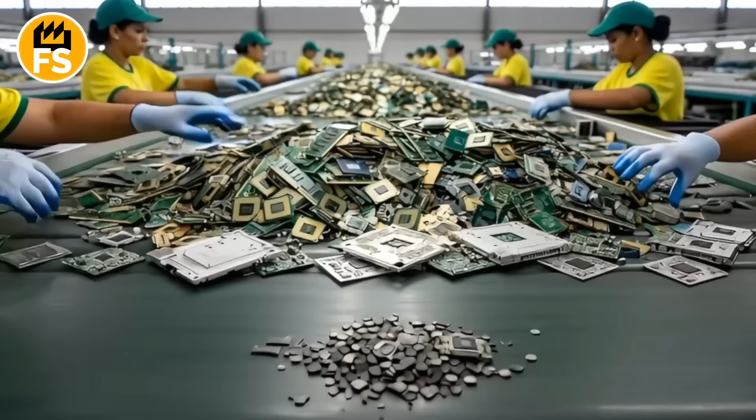Every year, over 50 million tons of electronic waste are generated worldwide, a weight greater than all the airplanes ever built by man. Some of this equipment disappears into the shadow market, while another part goes to legal centers where gold, copper, and palladium are extracted from it.

But what happens to your old laptop after you turn it in at a collection point? Where do the hard drives with personal data disappear? And how is pure gold of 99.9% purity born from a pile of scrap? Watch until the end, and you will find out what the most profitable side of electronics disposal is hiding.

In many cities, there are stationary or mobile points where people can bring old devices. They are often organized by municipalities, environmental organizations, or the recycling companies themselves. These points can be located in shopping centers, near supermarkets, or on separate sites.

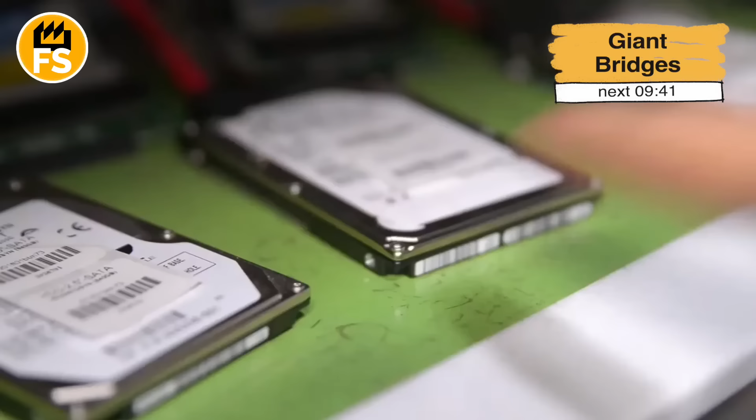Campaigns and promotions are regularly held, during which large retail chains or electronics manufacturers organize temporary collection points. This encourages people not to throw away e-waste, but to turn it in for recycling. Some companies offer services for picking up old electronics directly from homes, especially when it comes to large devices like refrigerators or televisions. Large volumes of electronic waste come from companies, offices, educational, and government institutions.

When companies update their computer fleets, servers, telecommunications equipment, they enter into contracts with specialized disposal companies. This allows them to comply with environmental standards and ensure the secure destruction of data. For a business, the destruction of confidential information from hard drives and other media is extremely important. Recycling companies often offer services for certified data destruction before recycling.

In many countries, there are laws that require electronics manufacturers to be responsible for the life cycle of their products, including their disposal.

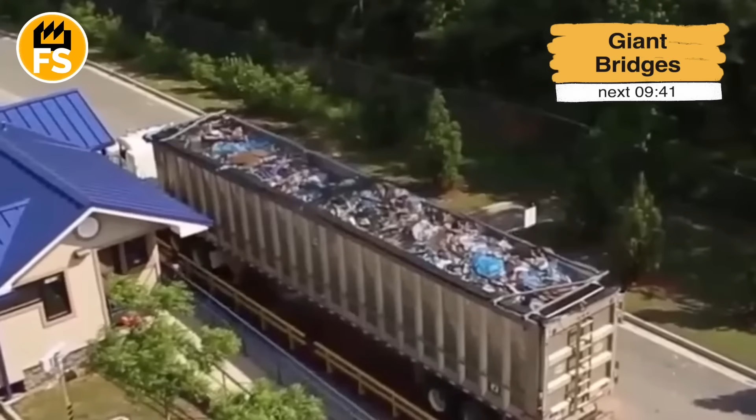When the electronics are collected, they are transported to the centralized warehouses of recycling plants. There, they undergo initial sorting. Large batches of a single type of electronics, for example, only old computer boards or only mobile phones, can be separated to optimize the further processes of disassembly and extraction of valuable materials. Thus, a whole stream of electronic devices enters the warehouse of a recycling enterprise, ready for their valuable components, including gold, to get a second life.

After the trucks deliver mountains of electronic waste to the recycling warehouse, the first and very important stage begins: manual disassembly. At this stage, teams of qualified technicians and operators work. This is not just breaking old devices. It is a systematic process aimed at maximizing the extraction of valuable components and separating hazardous materials.

Each workplace is equipped with the necessary tools: screwdrivers of various types, pliers, wire cutters, as well as specialized devices for safely opening cases. Proper lighting and ventilation are also important, as some components may contain harmful substances. Workers must wear protective equipment, gloves, goggles, and sometimes respirators.

The process begins with relatively light devices, such as laptops, desktop computers, and televisions. Specialists sequentially disconnect the main units. Lithium-ion batteries, found in laptops and mobile phones, are removed first. They are potentially flammable and contain valuable metals that require separate recycling.

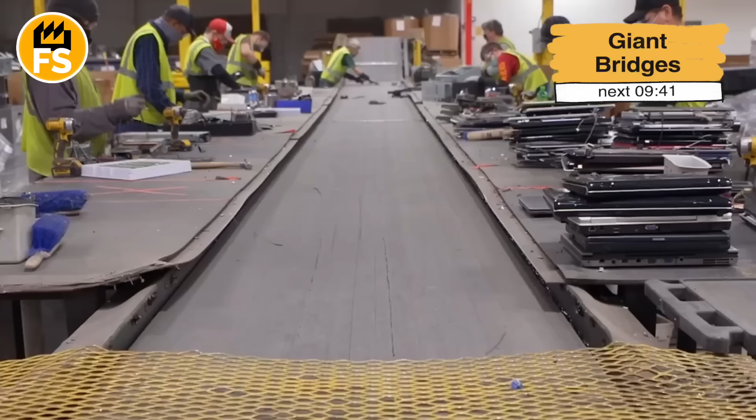Printed circuit boards are one of the richest sources of gold, as well as silver, palladium, and copper. The boards are carefully removed from the cases. Central processors and RAM modules are especially valuable, as they contain significantly more gold than other parts of the board, so they are often separated for separate, more intensive processing. Each removed component is placed in a special container.

For example, one container for printed circuit boards, another for processors, a third for batteries, a fourth for aluminum parts, and so on. This sorting is critically important, as it optimizes the subsequent stages of recycling. Components with a high gold content will be sent to more targeted and intensive extraction processes.

After the initial manual disassembly and sorting, when components with a high gold content, such as processors, memory, and gold-plated connectors, have been separated, much more targeted and intensive processes for their recycling begin. These methods are aimed at the most efficient and economically viable extraction of the precious metal. They combine mechanical, chemical, and sometimes even electrochemical approaches.

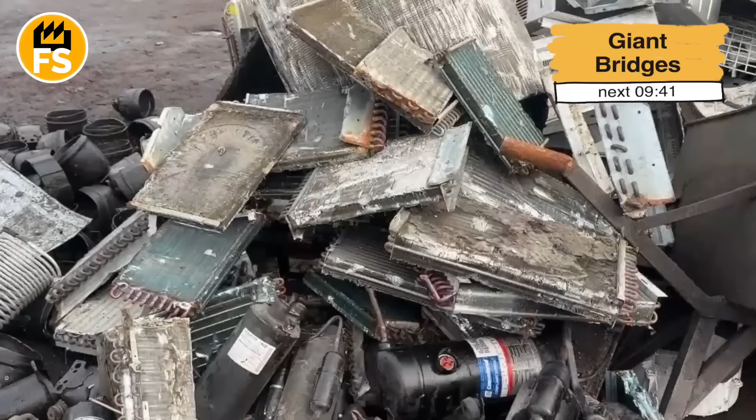The first step is often further mechanical processing to further concentrate the gold-bearing material. Processors, for example, consist of a ceramic or organic case, metal contacts, and sometimes metal covers. These parts need to be separated. This is usually done with the help of special shredders or milling machines that allow for the separation of the metal legs or contacts from the main part. Some processors may be subjected to thermal shock to crack the ceramic case and release the gold-bearing parts.

The separated gold-bearing metal parts are crushed into small granules or powder. This process increases the surface area of the material, which is critically important for further chemical processing. Usually, crushers are used, and then granulators, which grind the material to a fraction size in the range of 0.04 to 0.4 of an inch, and sometimes even smaller.

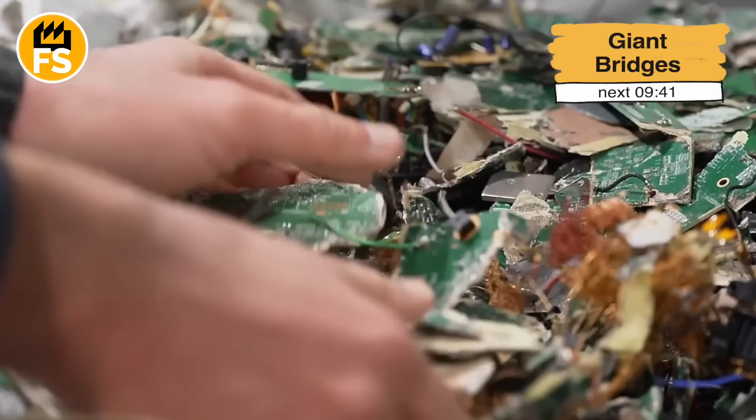After crushing, gravity separation may be applied, for example, vibrating tables, centrifugal separators, or hydrocyclones. Since gold is significantly heavier than most other metals and non-metallic impurities, these methods effectively separate fine gold particles from lighter materials, creating a more concentrated, heavy metal slurry.

For large volumes of gold-bearing concentrates, especially if they contain a significant amount of copper or other base metals, high-temperature smelting is used. The concentrated powder or fine granules may first be sintered or briquetted for more convenient feeding into the furnace and to reduce dust losses. The material is loaded into special electric or induction furnaces. Temperatures can reach 2,500 degrees Fahrenheit. During smelting, lime or silica is added, which reacts with oxides and other non-metallic impurities, forming a low melting slag.

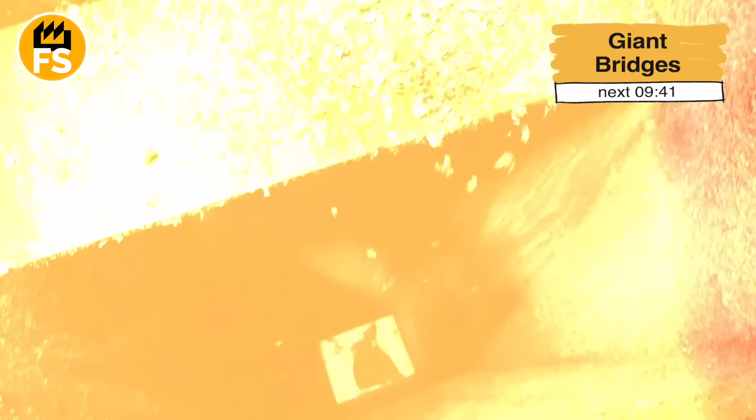Gold, like other precious metals, has a high affinity for molten copper or lead. Therefore, during smelting, gold dissolves in larger volumes of molten copper or lead, forming a so-called black copper or lead alloy. This alloy is then separated from the lighter slag. The alloy can then be further purified in converters, where air or oxygen is blown through the melt to oxidize the remaining base metals, which then pass into the slag. The output is an enriched alloy containing copper and all the precious metals.

After removing the main part of the base metals, the material is treated with reagents that dissolve gold. After dissolving the gold, the solution is filtered to remove undissolved solid residues. Then the gold ions are separated from other metals using various methods. Gold is precipitated from the purified solution by adding reducing agents. These compounds reduce the gold ions to a metallic state, forming a pure gold powder.

The gold powder is thoroughly filtered, washed with distilled water to remove residual chemicals, and dried. The resulting gold powder is melted in high-temperature induction furnaces and cast into ingots or granules. At this stage, high-purity gold is already obtained, often 99.9%.

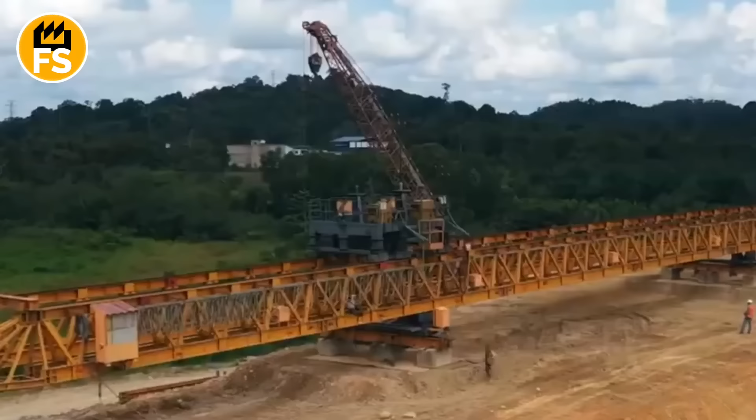Every year, over 500,000 bridges are built worldwide, but only a few of them challenge nature and time. To create a giant capable of withstanding thousands of tons of steel, windstorms, and earthquakes, engineers first dive into the very heart of the Earth, drilling the ground to a depth of over 100 meters, studying every layer of rock. Here, under water and mud, the foundation is born, on which the fate of the entire structure depends.

How do machines weighing as much as houses place piles with millimeter precision? And what will happen if even one of them shifts? Watch until the end, and you will learn what the engineering elite keeps silent about.

The construction of long bridges begins long before the first steel beams or concrete supports appear. It all starts with a site investigation. Engineers analyze the soil, the strength of the current, the level of seismic activity, and the depth of the bottom, if it's a river or a bay. Often, special drilling rigs are used to take rock samples at depths of over 300 feet. These data determine the type of the future bridge: suspension, cable-stayed, or beam.

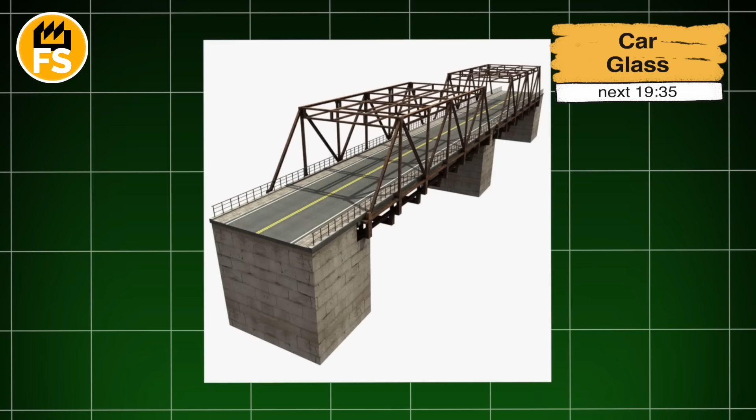After this, a three-dimensional model is created. It takes everything into account: the load from transport, the force of the wind, temperature fluctuations, and even the possible impact of waves during storms. For bridges longer than half a mile, the permissible error in calculations can be no more than a few millimeters. Otherwise, the structure may lose stability.

When the construction of a bridge moves from drawings to the actual ground, one of the most responsible and complex stages begins: the construction of the foundation, or the pile foundation. It is these structures, hidden under water or earth, that support the weight of the entire bridge: thousands of tons of steel, concrete, transport, and even wind load.

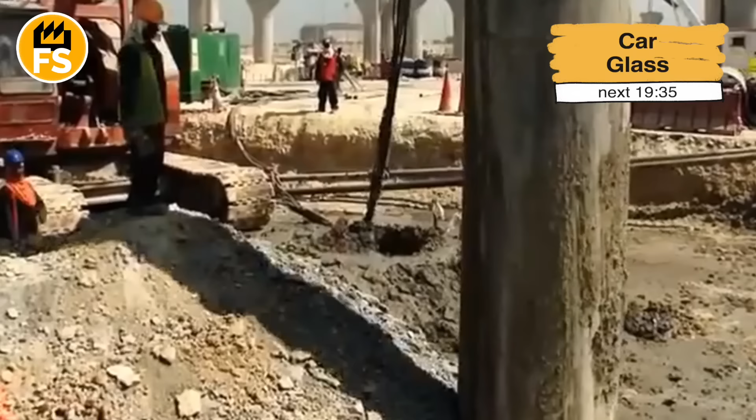Drilling cranes arrive at the site, giant machines with a long mast, a hydraulic drive, and interchangeable drills. They can reach the height of a 3-story building. Steel piles are brought to the worksite. Usually these are pipes with a diameter from 3 to 6 feet and a length of up to 100 feet. In marshy or marine areas, the piles are even larger, sometimes up to 150 feet.

The drilling process takes place in stages. The machine is positioned with an accuracy of a few inches. For this, laser and GPS systems are used. Then the operator lowers the drill into the ground. The powerful rotation of the bit crushes the rock, and a hydraulic system pumps out the resulting pulp. In some areas where the soil is unstable, drilling is carried out with the immersion of casing pipes, metal casings that prevent the walls of the well from collapsing.

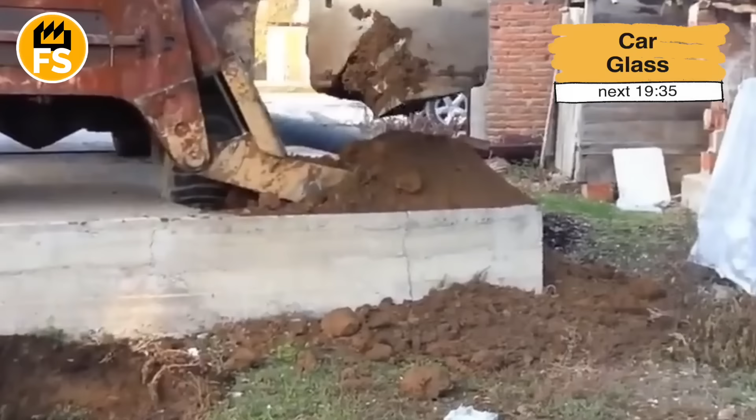When the hole reaches the specified depth, a steel pipe, the pile casing, is installed in it. A reinforcing cage is lowered inside, which strengthens the structure, after which concreting under pressure begins. Through a special hose, a concrete mixture is supplied from the bottom up, displacing water or mud. Thus, a dense, air-free mass is formed, which over time hardens into a monolith.

In marine areas, floating barges with drilling rigs are used. Divers control the position of the pile underwater, and engineers monitor the process with ultrasonic sensors. In a strong current, drilling is carried out only during periods of calm, when the wave level is minimal.

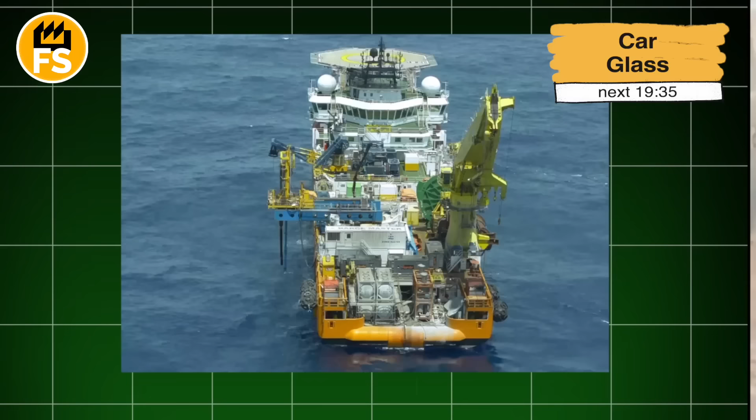When the piles are installed, their tops are cut to the required height, and capitals are mounted on them: large concrete blocks that unite several piles into one support. After this, pylons or columns are erected on these foundations, which are already visible above the surface.

On land, temporary sites are simultaneously set up. These are logistics centers where beams, cables, reinforcement, and concrete sections are stored. Often, huge cranes 300 feet high are used here, which can lift blocks weighing over 200 tons.

When the supports are ready, the turn of the superstructure comes. For bridges of great length, two main technologies are used: suspension and cable-stayed. In a suspension bridge, the main load is carried by steel cables. To secure them, two massive towers, pylons, are first erected. Their height can reach 700 feet, as in the Golden Gate Bridge in San Francisco. The towers are assembled in sections, lifting each one with a crane and connecting them with bolts and welding.

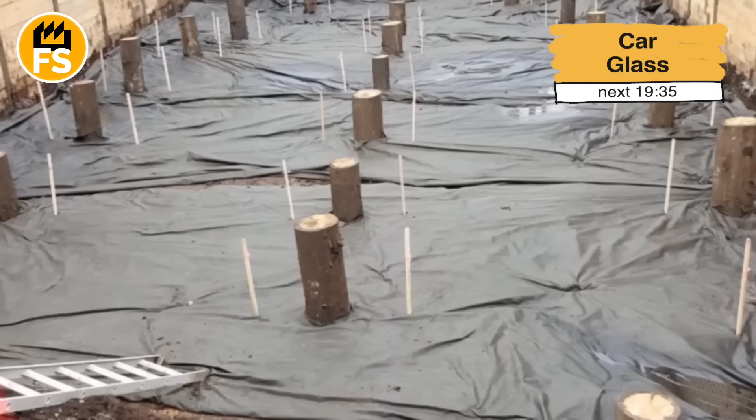After the installation of the pylons, the main cables are stretched between them. This is a complex process that is carried out in stages. Thin steel wires, the thickness of a finger, are stretched one by one by the hundreds, until a main cable several feet thick is formed. Then vertical hangers are attached to these cables. They will hold the roadbed.

In cable-stayed bridges, the main load is transmitted through inclined cables that go directly from the towers to the sections of the roadway. Such cables are made of steel strands with a polymer coating, capable of withstanding a load of over 500 tons. They are installed with the help of hydraulic winches, which precisely regulate the tension.

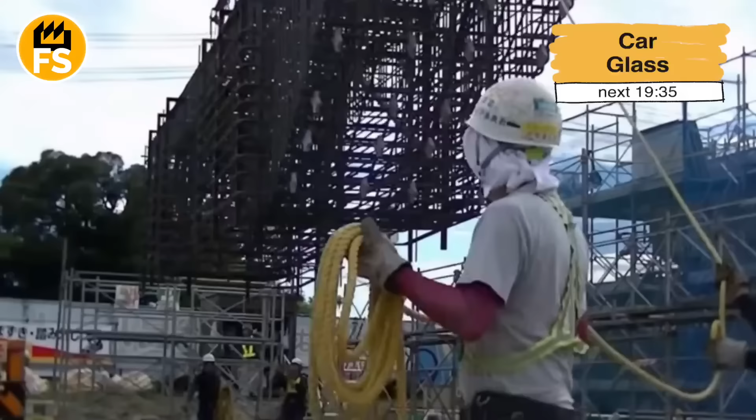The installation of the span sections is one of the most impressive stages in the construction of a bridge, when the giant engineering structure literally begins to connect the shores. Each section is a finished fragment of the road, made of high-strength concrete or steel at a specialized plant. There they are formed in giant molds, reinforced with steel bars, treated in thermal chambers for rapid strength gain, and then marked and checked for accuracy with a laser system. After this, these blocks are transported to the construction site.

If the bridge is laid across a body of water, the sections are delivered by barges, floating platforms capable of withstanding hundreds of tons. On land, they are transported by multi-axle trailers with dozens of wheels, which evenly distribute the weight. The movement of such columns is usually accompanied by police, as each block can be from 100 to 400 tons and over 100 feet long.

At the construction site, floating cranes or lifters are already waiting. These are powerful lifting systems capable of lifting a load of over 500 tons. Most often, such cranes are mounted on pontoons or mobile platforms that can accurately maneuver over the water. During the lift, the crane operator coordinates his actions with the engineers who are on the bridge supports. Every movement is a matter of inch precision, as the section needs not just to be lifted, but placed perfectly in the design position.

When the block is suspended above the supports, it is slowly lowered. Workers fix the position with the help of special guide pins and laser marks. Then dampers and high-strength connecting bolts are installed in the joints of the sections. It is important that the sections fit together without the slightest misalignment. Even an error of half an inch can cause uneven load.

Next, the joints are filled with cement mortar under pressure, which fills all the voids and forms a monolithic connection. In some types of bridges, post-tensioning cables are used, steel strands that are threaded through the internal channels of the sections and tensioned with hydraulic jacks, providing additional strength.

If the bridge is being built over the sea, the installation is even more complicated. Barges with sections are tied to positions with an accuracy of a few feet using GPS, and the lifting takes place only in calm seas. Often at night, when the wind is weaker and the waves are minimal, the crane slowly lifts a section. The process can take several hours. From the side, it looks like a giant aerial operation.

A steel or concrete slab, as huge as a two-story building, smoothly rises above the water or a gorge, moving with an accuracy of a few centimeters. When it is fixed between the supports, the bridge literally grows. Another span, another few tens of feet of road, which bring it closer to completion.

In parallel with the installation of the roadbed, communications are laid: lighting systems, communication wires, pipes for rainwater drainage. Most bridges have sensors that measure vibrations, temperature, the tension of the cables, and even the concentration of salts in the air. These data are constantly transmitted to a control center.

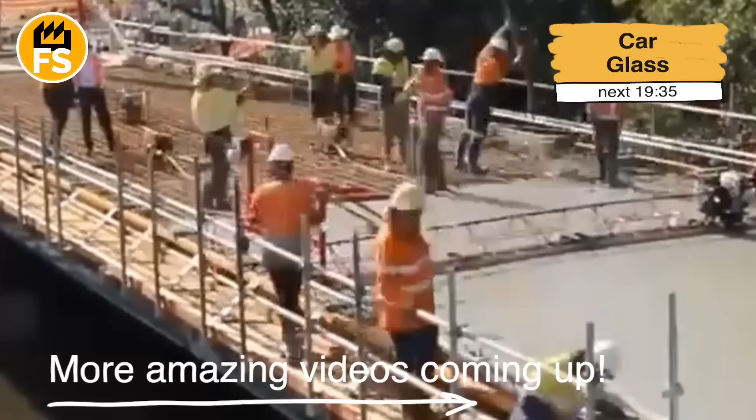When the main structure is completed, the road surface work begins. The surface consists of several layers. The first layer is a special anti-corrosion compound that protects the concrete and metal. Next, waterproofing is applied, then several layers of asphalt or polymer concrete, about 4 inches thick. For suspension bridges, lighter materials are used to reduce the load.

The final stage is the installation of railings, noise barriers, and the painting of steel elements. The painting has not only an aesthetic function, it also protects the metal from corrosion. For bridges over the sea, paints with the addition of zinc are used, which create a stable protective layer.

After the completion of all work, the bridge undergoes a series of tests. Special trucks are loaded onto it to check how the structure reacts to weight. Vibration tests are also conducted. Engineers check how the bridge behaves during wind or the movement of trains and cars. If the indicators meet the standards, the object is put into operation.

Imagine, glass that once shattered into deadly sharp fragments now saves lives. How did humanity transform a fragile substance into armor for a car? And what is hidden behind this seemingly simple transparency? Every year, over 100 million square meters of automotive glass are produced worldwide, enough to cover the area of an entire country. But the real magic happens where molten stone is transformed into a perfectly smooth surface, in furnaces that reach temperatures of over 2,700 degrees Fahrenheit.

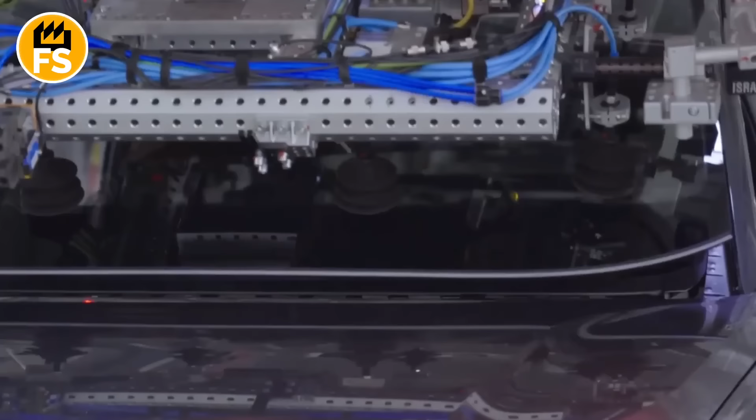How did ordinary quartz sand become the foundation of safety technology, without which we cannot imagine modern transport? Watch until the end, and you will learn what accidental experiment changed the history of automobiles forever.

The history of automotive glass production is closely linked to the development of the automotive industry, which emerged at the end of the 19th century. The glass used in cars today has come a long way in improvements, making it safer, stronger, and more functional. When the first cars began to appear, they were initially not equipped with glass at all. The open body design only partially protected passengers, and dust, wind, insects, and other hazards made trips very uncomfortable.

Later, as cars became faster, the need to install protection for the driver and passengers arose. The windshield began to be made from ordinary window glass, which, although it provided some protection, had a serious drawback. During accidents, it shattered into large, sharp fragments, leading to numerous injuries.

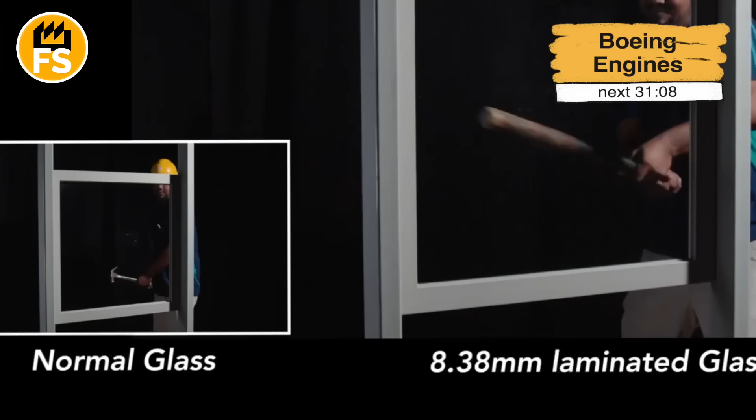The first revolutionary discovery in the field of automotive glass was the creation of laminated glass. This happened by chance. In 1903, the French chemist Edouard Benedictus accidentally dropped a flask with a nitrocellulose coating. The glass cracked but remained whole thanks to a thin layer of plastic. This accident inspired the scientist to create multi-layered glass, which later became the basis for triplex.

Already in the 1910s, laminated glass began to be used in premium class cars. Its construction consisted of 2 layers of glass, between which a thin, transparent film was placed. In the event of an impact, the glass did not shatter, and the cracks remained on the film.

In the 1920s, laminated glass began to be actively used in the production of windshields. Its main advantage was increased safety. Even during serious accidents, the fragments did not fly apart but remained in the polymer layer.

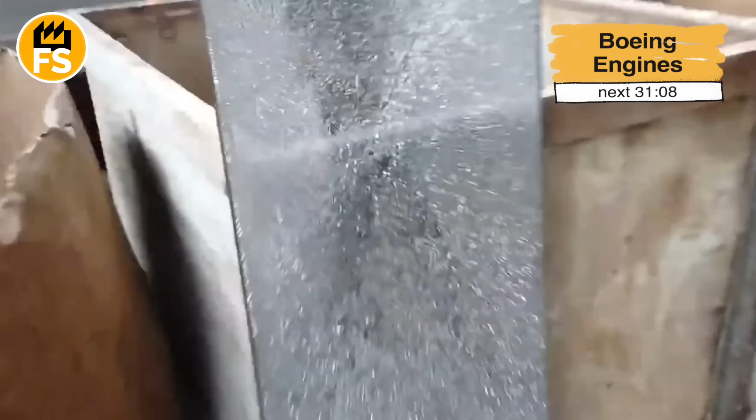The next stage in the development of automotive glass came in the 1930s, when the technology for producing tempered glass was patented. This material was produced by heating glass to high temperatures followed by rapid cooling. As a result of this process, the glass became stronger, and when it broke, it disintegrated into small pieces with blunt edges, which minimized injuries.

In the mid-20th century, tempered glass began to be used for the side and rear windows of cars. It was cheaper to produce compared to triplex and provided a sufficient level of safety for these parts of the car. In the 1950s and 60s, automotive glass became even more perfect thanks to the development of technology. During this time, various important changes took place.

Improvement of triplex. The development of new polymer films made laminated glass more transparent, resistant to ultraviolet radiation, and durable. Mass production. The automation of production processes allowed for a reduction in the cost of automotive glass, which made it more accessible to the mass market. Sun protection coatings. For the first time, special coatings began to be used that blocked ultraviolet light and reduced the heating of the car's interior.

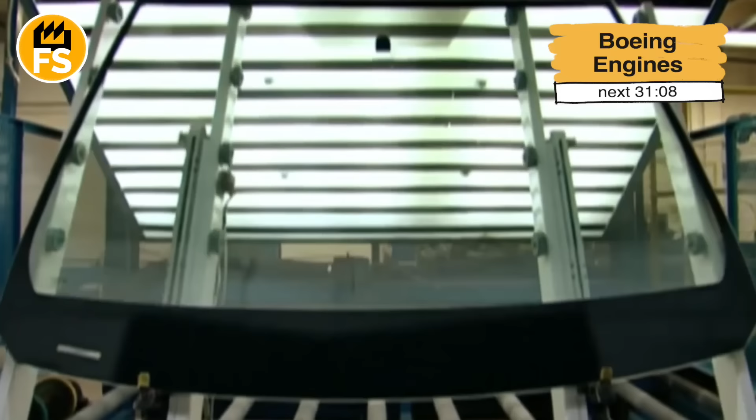One of the most important technological breakthroughs in glass production was the invention of the float method in 1959. This technology, developed by the British company Pilkington, allowed for the production of perfectly smooth glass by spreading the liquid glass mass over the surface of molten tin. Thanks to this method, glass became more uniform, strong, and accessible for mass production. The float method is still the basis of automotive glass production today, ensuring its precise dimensions, surface smoothness, and high quality.

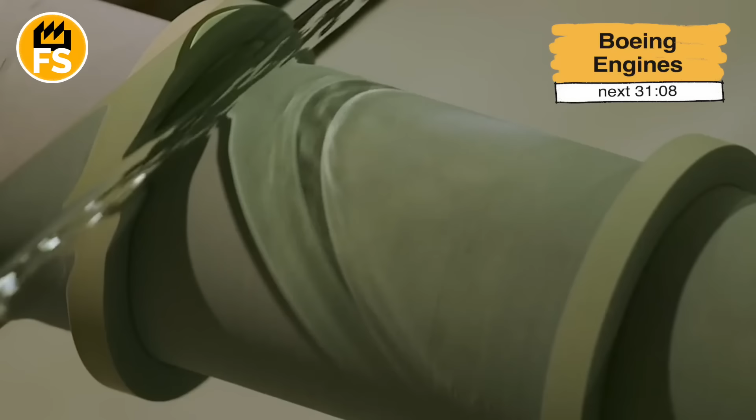In the second half of the 20th century, automotive glass underwent even more changes aimed at improving safety and comfort. In the 1960s, heating filaments began to be installed in the rear windows of cars, which prevented fogging and freezing of the glass. In the 1980s, glass with special metal coatings appeared, which reflected sunlight and reduced the heating of the interior. Glass with ultraviolet protection. Thanks to the introduction of new technologies, automotive glass began to provide almost complete protection against harmful radiation.

And then we begin the modern period of automotive glass production, which we will talk about now. And we will start with glass for cars. Automotive glass is divided into several types depending on its purpose and production technology. Windshield. Usually this is multi-layered glass, which consists of 2 layers of glass, between which a polymer film is located. Such a design ensures that upon damage, the glass does not fly into sharp fragments.

Side and rear glass. Most often this is tempered glass, which upon impact breaks into small blunt-angled pieces, which reduces the risk of injury. Panoramic roofs or other special types of glass. Laminated or tempered glass with a special coating for protection against ultraviolet radiation is often used.

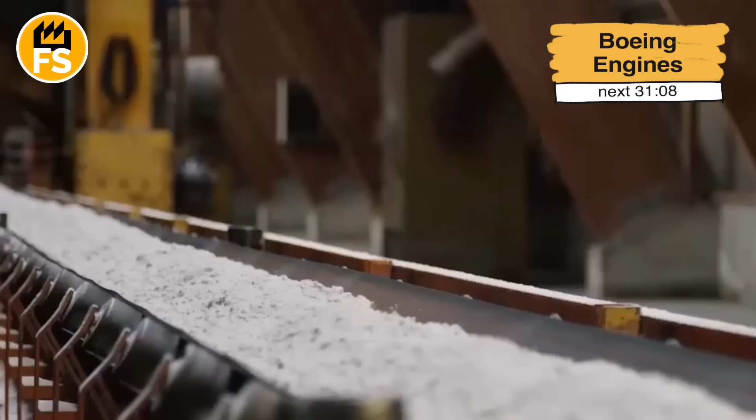The main components of glass are natural materials that are mixed in certain proportions to obtain the desired properties. Quartz sand is the main component of glass, which ensures its transparency. It must be extremely clean and contain a minimum of impurities. Soda is added to lower the melting temperature of the glass. Lime improves the mechanical stability and chemical properties of the glass.

Additional additives are used to correct color, transparency, resistance to ultraviolet light, and other properties. The raw material is cleaned, dried, and crushed to a uniform state. It is important that impurities that can affect the quality of the glass are maximally eliminated.

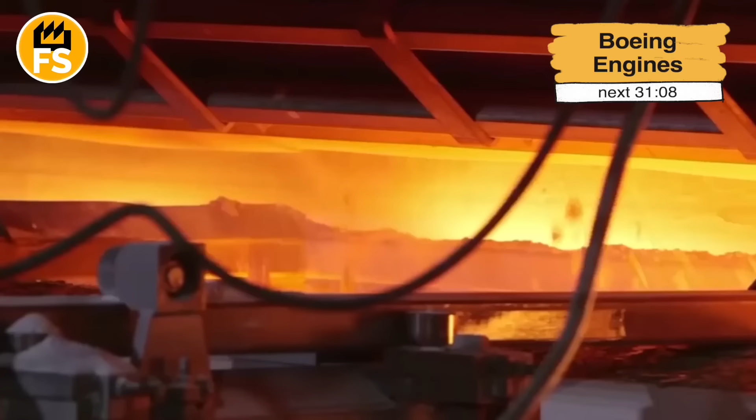After preparing the raw material, it is loaded into special furnaces for melting. This stage includes several important moments. Let's look at them together. Melting temperature. A temperature of about 2,732 degrees Fahrenheit is used to form the glass mass. In the melting process, the raw material turns into a uniform viscous liquid.

Homogenization. The glass mass is mixed for an even distribution of components. This is important to avoid air bubbles or inhomogeneities in the finished product. Furnaces for melting glass are equipped with modern temperature control systems and process automation, which ensures high quality of the final product.

After melting, the glass mass undergoes a forming process, which in modern production is most often performed using the float method technology. Feeding the glass mass, the liquid glass flows out of the furnace and onto a bath of molten tin. Thanks to the high density of tin, the glass mass spreads evenly over its surface. Under the influence of its own weight, the glass forms a perfectly even and smooth surface. By gradually lowering the temperature, the glass acquires hardness. At the exit of the bath, it can already be processed. The float method allows for the production of glass sheets with precise geometric parameters and high surface quality.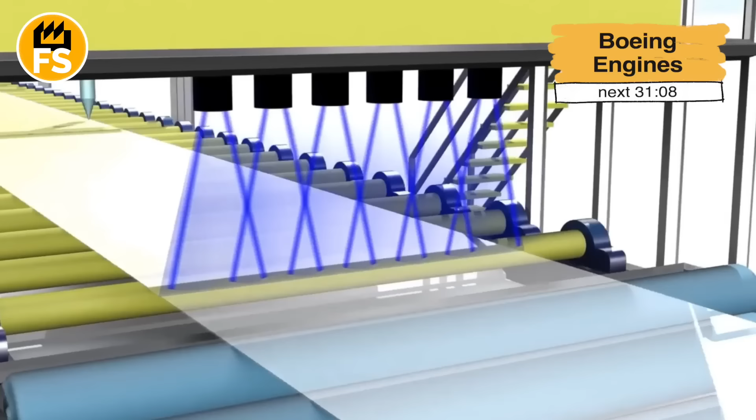After cooling, the glass sheets are cut according to the dimensions required for automotive production. Automated cutting machines ensure the accuracy of the work. To prevent the formation of cracks and chips, the edges of the glass are ground. Each sheet is checked for defects, such as microcracks, bubbles, or other damage.

Next, to ensure the strength and safety of automotive glass, it is subjected to a tempering process. The glass is heated to a temperature of about 1,112 degrees Fahrenheit. Then, the surface of the glass is rapidly cooled by streams of air, while the inner layers cool more slowly. As a result, stress is created, which increases impact resistance. Tempered glass, when destroyed, breaks into small, safe fragments, which minimizes the risk of injury.

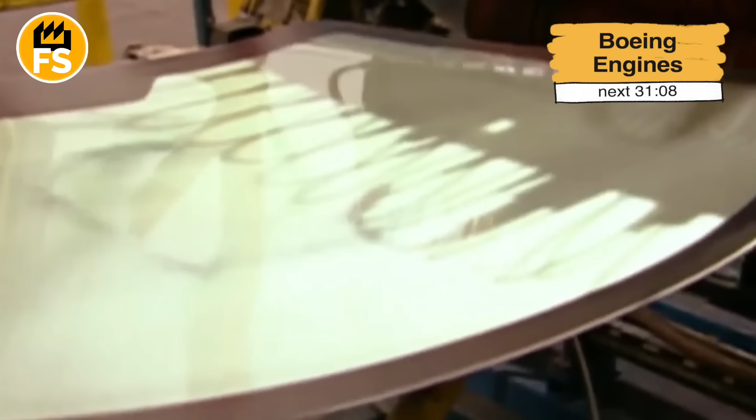Next, for the windshield, triplex is used, a construction of glass and polymer film. Its production includes several stages. Joining the layers. A polymer film is placed between 2 glass sheets. The construction is placed in a vacuum press to eliminate air bubbles. Next, the glass is heated in an autoclave to a temperature of 284 Fahrenheit under high pressure. This ensures a strong connection of the layers. Triplex has high impact resistance, and upon damage, it remains in the polymer film, which ensures the safety of the driver and passengers.

Next, to improve the properties of automotive glass, various coatings are applied to it. Anti-reflective coatings reduce glare from the sun or headlights of other cars. Ultraviolet protection. Special layers block harmful ultraviolet radiation. Hydrophobic coatings ensure that water runs off the surface of the glass. Heating elements. Thin heating filaments can be embedded in the windshield, which facilitate the removal of ice or fogging.

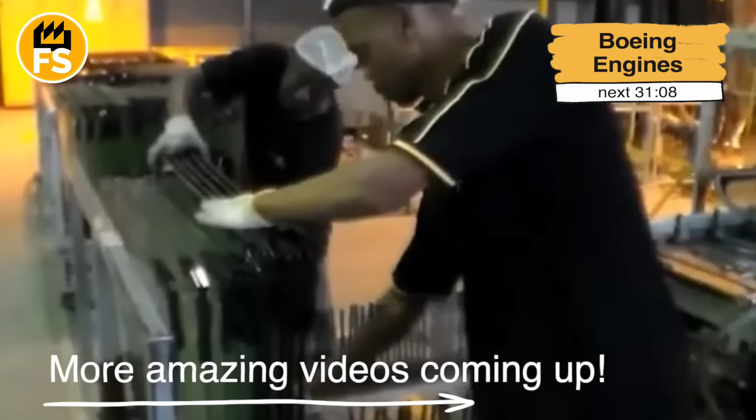To achieve the desired shape, special thermoforming installations are used. The glass is heated to a temperature at which it becomes plastic and is formed according to the given parameters. And so, we have reached the final stage. During it, each product undergoes a thorough check. Transparency and the presence of defects are checked. Next, the glass is tested for impact resistance and endurance to loads. Compliance with standards. The accuracy of dimensions, shape, and other parameters are checked.

Then the finished automotive glass is packaged in such a way as to avoid damage during transportation. It is delivered to car factories or service centers, where it is installed in vehicles. The production of automotive glass is a high-tech process that combines physics, chemistry, and engineering. Thanks to modern technologies and strict quality control standards, automotive glass ensures safety, comfort, and durability. And just imagine how many stages the automotive glass had to go through for us to be able to monitor safety on the road and have the opportunity to admire the wonderful landscapes. It seems incredible to me.

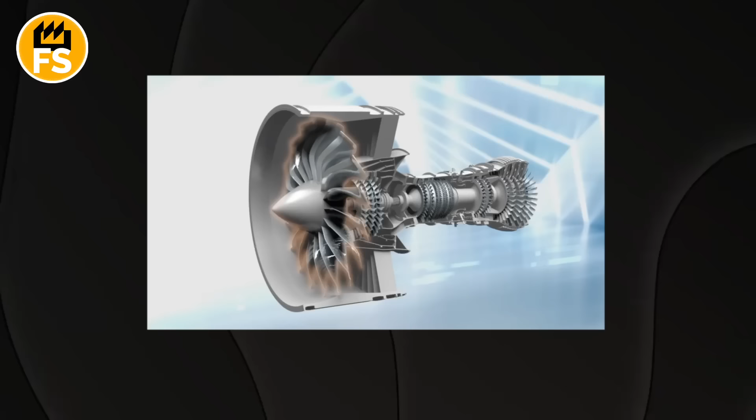The turbofan engines that push giants of the sky, like Boeing and Airbus planes, resemble something out of science fiction. However, they are a true embodiment of engineering genius. How are these amazing machines assembled from tens of thousands of parts and ingredients, like a puzzle? Ordinary metals are not suitable for their manufacture. After all, the engine must operate in conditions where the temperature can exceed 1,800 degrees Fahrenheit. This is a real inferno, and ordinary steel simply wouldn't withstand it.

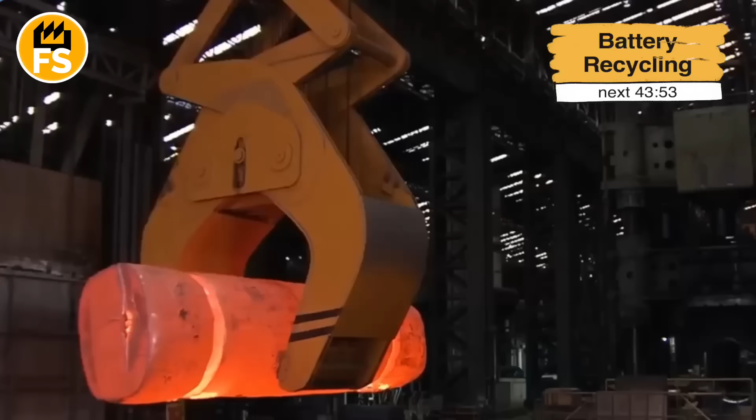This is where titanium alloys come on stage. Lightweight, strong, and able to not melt in extreme heat. And for the hottest zones of the engine, nickel-based superalloys are used. By the way, this isn't just metal, it's 21st century alchemy. Composites, particularly carbon fibers, are used for the fan to reduce weight while maintaining strength.

Such a high temperature arises from the process of burning fuel in the combustion chamber, one of the most important elements of a turbofan engine. During engine operation, aviation fuel, usually jet fuel, is mixed with air and ignites, forming hot gases. These gases are literally accelerated to insane speeds and temperatures, over 1,800 degrees Fahrenheit, and sometimes even up to 2,700 in modern engines. This level of heat is needed to get the most efficient thrust.

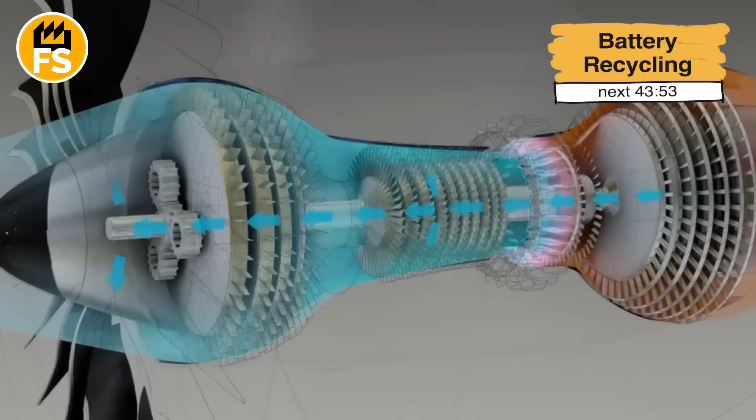That is, the hotter and faster the gases, the stronger the energy flow that spins the turbine and provides the aircraft's motion. And here lies the main challenge. The engine must not only withstand these extreme conditions, but also operate stably, without the slightest failure. That's why it uses super technological materials, like titanium alloys and special composites, which can withstand both high temperature and insane mechanical stress.

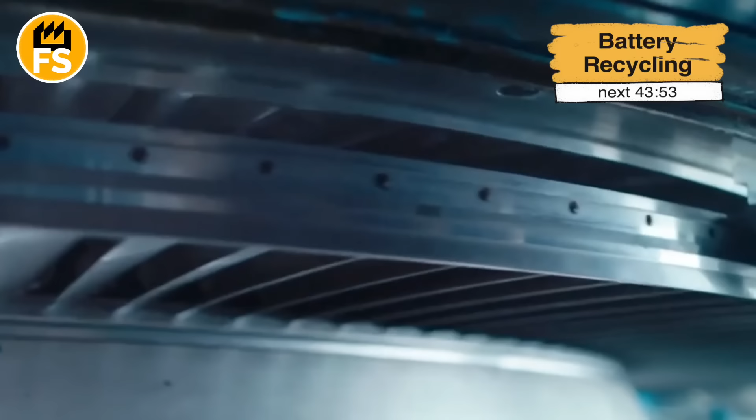You know what's incredible about the process of creating an engine? That even individual parts, like the turbine blades, are created with micron precision. For example, the blades are cast in a vacuum so that there isn't even the smallest crack inside. Some of them are formed to have a single crystal structure. That's when a piece of metal has no seams at all. But that's not all. 3D printing? Yes, that's used too. For example, for complex parts that are impossible to make with traditional casting.

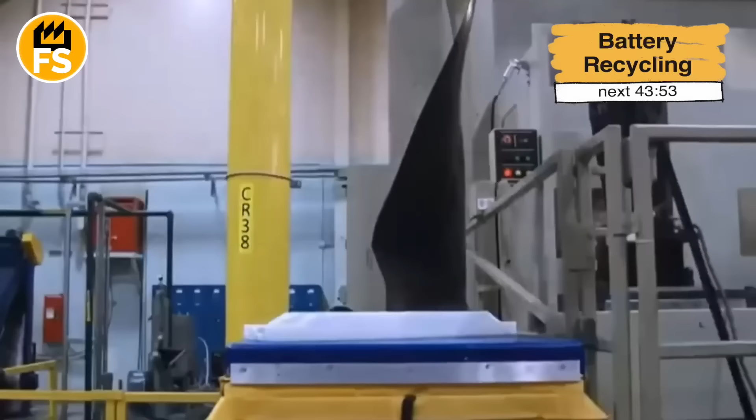The turbine blades are the heart of the engine. They operate in the hottest zone and convert the energy of the hot gases into rotational motion. First, a model of the blade is created from wax. Yes, it looks almost like artistic sculpting, only here, precision down to the micron is important. This wax sample is then dipped into a special ceramic solution, which gradually dries, forming a strong mold. This mold is like a perfect cast of the future blade. The wax inside is melted and removed, and the ceramic is ready for the most important stage.

Next, the show begins. In a special furnace, superalloys are melted, which include nickel, chromium, and other metals capable of withstanding temperatures above 2,000 degrees Fahrenheit. This molten metal is poured into the ceramic mold. But the secret is not only in the material, but also in the way it's done. To make the blade withstand gigantic temperatures and loads, it is often cast as a single crystal. This means that the entire piece of metal has no seams, micro cracks, or different grains, as in ordinary metal.

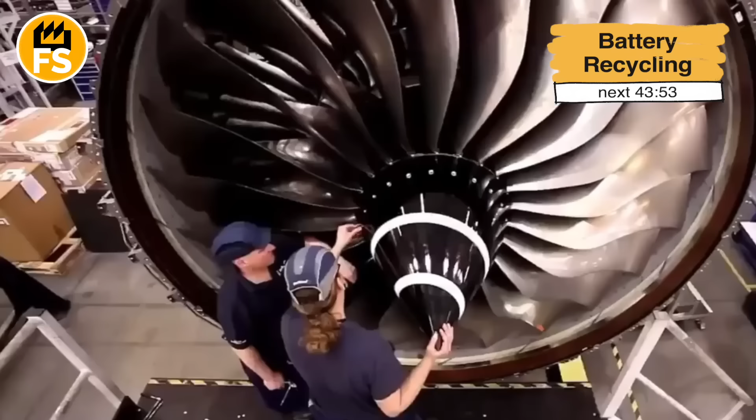Why is this important? Seams or micro cracks in such conditions are like a minefield. One mistake, and the blade shatters. Single crystals are grown through very slow cooling. The mold with the molten metal is gradually lowered into the cooling zone of the furnace. This process can take several days, but the result is a perfectly strong and durable blade.

When the metal cools, the ceramic mold is broken, and the blade undergoes thorough grinding. A special heat-resistant coating may be applied to the surface so that it can withstand extreme temperatures even longer. And so, each blade is checked separately. If there is even the slightest defect, it doesn't go any further.

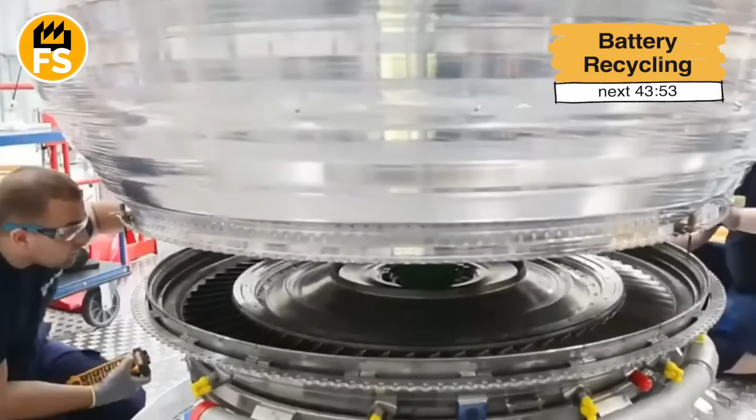Fuel injection nozzles, combustion chamber parts, or even compressor blades in aviation are made using 3D printing. For example, the company GE Aviation prints nozzles for its engines that weigh 25% less, but are 5 times stronger than traditional ones. Layer by layer, from powder and light, parts are created that allow planes to fly faster, farther, and more economically.

First, engineers create a digital 3D model of the part with maximum precision. Here, every curved surface or cavity matters. Why? Because these parts often work in places where a millimeter can change everything, from the engine's efficiency to its reliability. The digital model becomes a map for the 3D printer, which knows where and how to create the required shape.

Instead of the usual piece of metal, an ultrafine powder is used here. For example, of titanium, nickel, or Inconel, this is a super alloy. It looks like sand, but with particles so fine that they are almost invisible to the naked eye. The powder is poured into a special reservoir, and it becomes the building material.

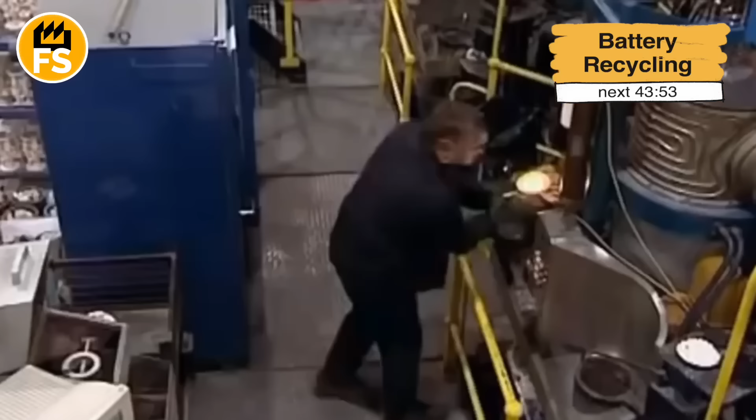The principle of the printer's operation is simple but ingenious. It melts the powder using a laser or an electron beam. The laser heats the powder to such a temperature that it literally fuses into a homogeneous metal structure. Then the next layer of powder is applied, and the process is repeated. This method is called selective laser sintering or melting.

And what's cool is that 3D printing allows for the creation of even the most complex geometric shapes. For example, parts with internal cooling channels, which are generally impossible to produce by casting or milling. You know, in traditional manufacturing, you often have to first make a large part and then cut off all the excess. This is not only time-consuming, but also expensive because a lot of material is wasted. But 3D printing works differently. Only what is needed is created without waste.

The resulting part is not yet completely ready. After printing, it undergoes heat treatment. It is heated and gradually cooled to relieve internal stresses in the metal. Then comes the final grinding, polishing, or mechanical processing if precision needs to be adjusted. And of course, each part undergoes thorough testing. After all, everything here is serious. If a part does not withstand the load, the consequences can be catastrophic.

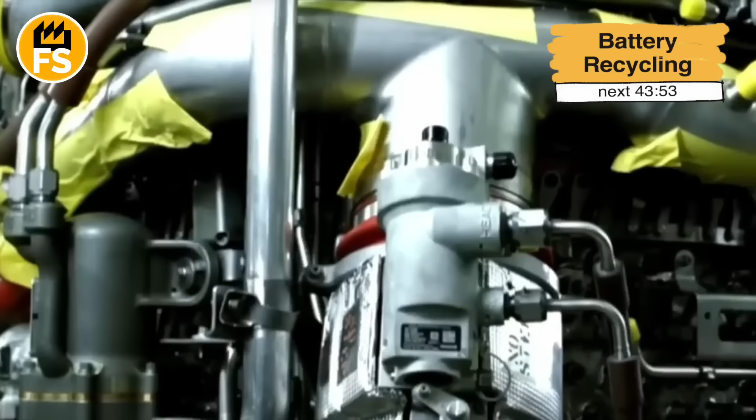The engine assembly takes place in a huge hangar, where every foot of space is occupied by tools, engine parts, and people in overalls who are intently working on something extraordinary. This place is the final stage of creating an aircraft engine. Here, individual parts such as blades, compressors, combustion chambers, and casings are transformed into a single whole, ready to lift an airplane into the sky.

It all starts with the engine casing, which resembles a giant metal cylinder. This is the skeleton to which all other parts will be attached. The casing is made of titanium or nickel alloys, as it will have to withstand insane loads. Engineers work like watchmakers. The casing is secured in a huge machine tool to ensure everything is perfectly level.

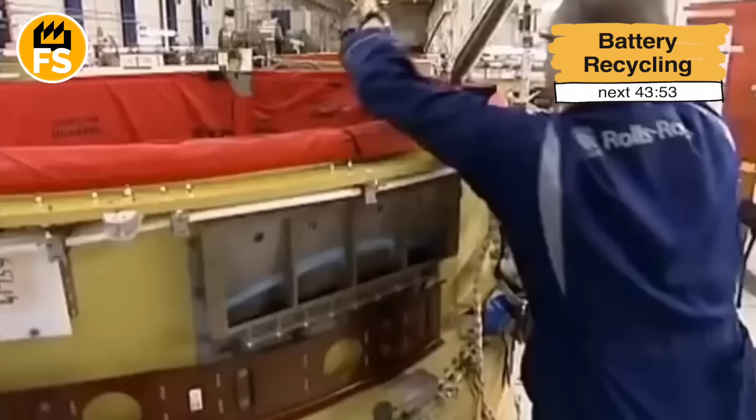Next come the compressors, several rows of blades that are responsible for compressing the air before it is fed into the combustion chamber. The blades are installed one by one, as if decorating a giant wheel. Each one is checked by hand, as the slightest defect can ruin the entire job. After the compressors, it's the turbine's turn. These are the blades that convert the energy of hot gases into motion. The turbines are placed so precisely that the distance between the blades and the casing walls is sometimes measured in microns.

Next, the combustion chamber is installed, the real hell of the engine. Here, compressed air is mixed with fuel and burned. Engineers install special nozzles that ensure a uniform fuel supply. And here, everything must be perfect. An incorrect nozzle angle, and the engine can lose efficiency or even fail.

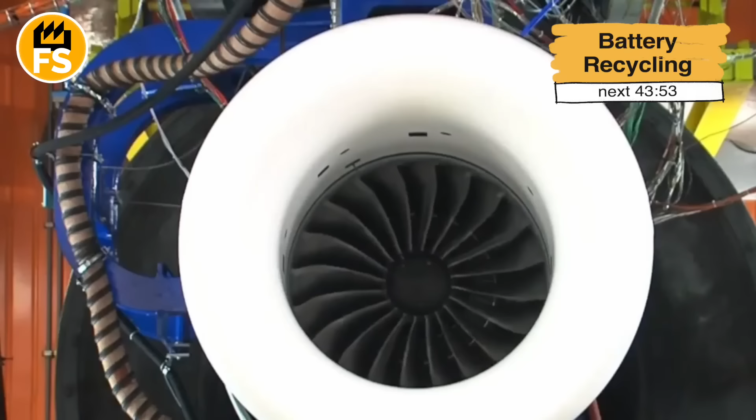A central shaft runs through the entire engine, a kind of backbone. At one end of the shaft, a fan in the form of a huge wheel is attached to the front of the engine. At the other end, the turbine. When the turbine rotates under the influence of hot gases, the shaft transmits this energy to the fan, which sucks in air. Special robots are used to install the shaft. This part of the process requires surgical precision, as even a microscopic misalignment can cause vibrations that will kill the engine.

When the internal part of the engine is assembled, the external systems are added. Fuel pipes that supply fuel to the combustion chamber, an oil system that provides lubrication for all moving parts, and electronics, because the engine is literally packed with sensors that monitor temperature, pressure, speed, and much more. These elements are attached using cables, tubes, and bolts that must withstand not only vibration, but also extreme temperatures.

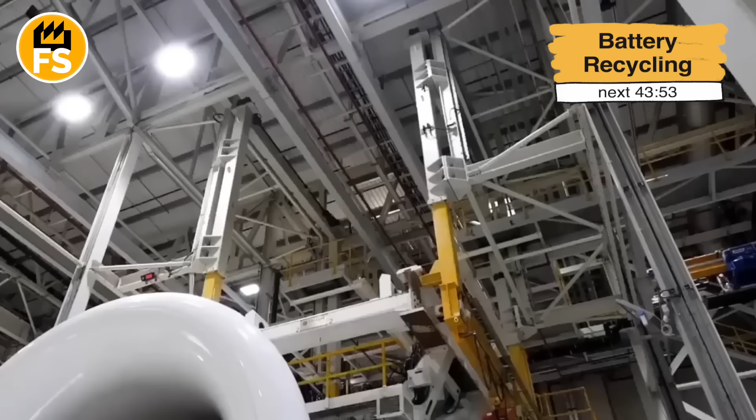After the assembly is complete, the engine is not sent to the aircraft right away. First, it is attached to a test stand, where real flight conditions are simulated, from takeoff to turbulence at an altitude of almost 33,000 feet. This is the most spectacular stage. Starting the engine at full power is accompanied by a roar that can be heard for several miles and bright gas streams. The engine runs under load for hours, and engineers check it for strength, endurance, and efficiency.

When the engine passes all tests, it is disassembled, the main components are checked again, and then it is finally assembled. The finished engine is packaged and transported to a Boeing or Airbus factory, where it becomes part of a new aircraft. And so, part by part, engineers create the heart of an airplane, which is capable of carrying thousands of passengers across continents. Isn't that a modern masterpiece?

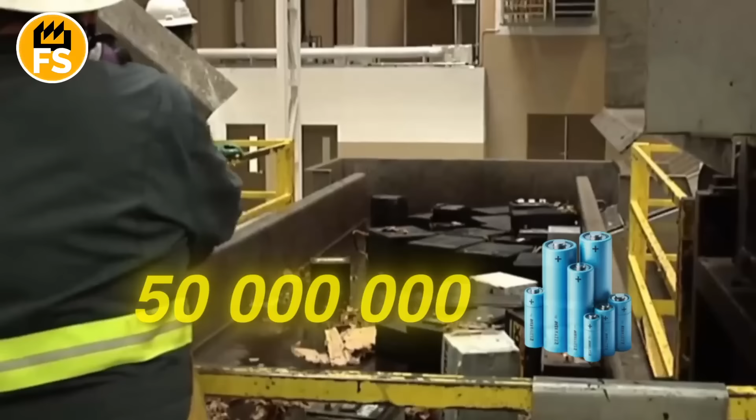Every year, over 50 million tons of batteries are discarded worldwide, from small AA batteries to giant electric vehicle batteries. Imagine a mountain of metal reaching the size of Mount Everest, filled with toxic substances. But now, part of this mountain gets a second life.

Behind the thick walls of factories, old batteries are put into shredders where steel blades tear them apart. They are frozen with liquid nitrogen and turned into a black powder that will once again become lithium or cobalt. Watch until the end. You will see how a new future for energy is born from waste.

Battery collection starts with people. Private individuals turn in batteries from phones and laptops. Car service centers, batteries from electric vehicles, and also businesses that use a lot of equipment. Collection points are in electronics stores, supermarkets, or specialized collection centers.

Here, everything is as manual as possible. People bring batteries, and staff or volunteers accept and record them. Old batteries from factories or car service centers are delivered by trucks to large collection centers.

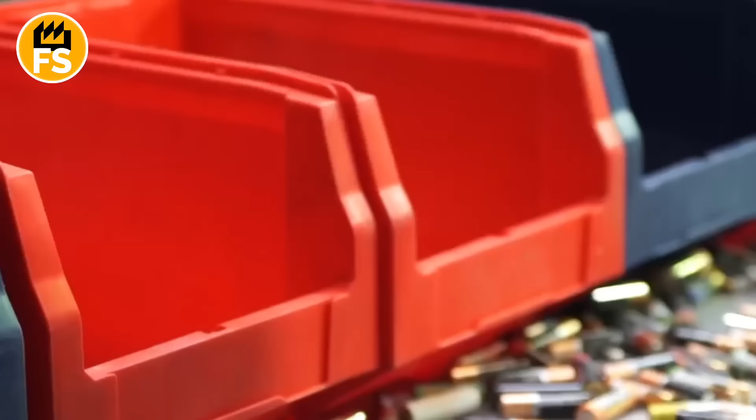Special battery containers have sensors that determine the fill level. When a container is almost full, a signal is sent to the collection company. Some companies use drones to check the fill level of large containers in remote locations.

Batteries are sorted by type by people and machines, because batteries come in different types: lithium-ion, nickel metal hydride, lead acid, and so on. They cannot be mixed during recycling. At small collection points, for example, in cities, batteries are sorted manually by workers. They rely on markings, labels, and appearance such as shape and case color. Small batteries from smartphones or laptops go in one direction, and large batteries from electric vehicles in another.

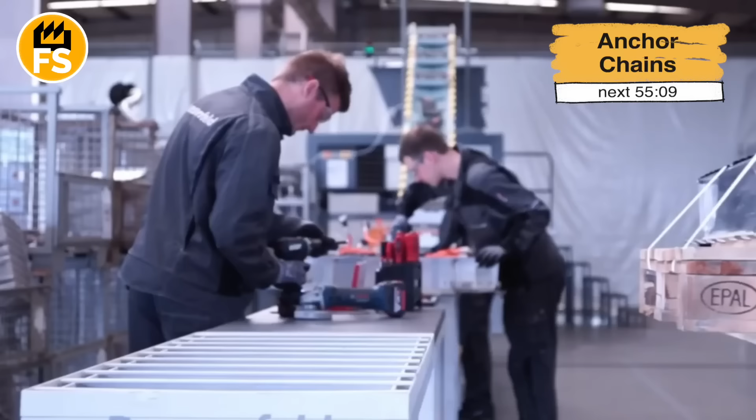At large enterprises, automatic sorting lines are in operation. Machines scan batteries by size, weight, and the type of metals they contain. X-ray analysis or spectroscopy is used to determine exactly which battery is in front of the machine. After scanning, the batteries move along a conveyor to different bins, where they await the next stage.

Even at automated factories, people are present. Operators check whether the machines are sorting the batteries correctly. If a problem arises, for example, a torn battery case or a missing label, people intervene and sort manually. Batteries from electric vehicles or solar stations are too large for automatic lines. This is where robots come into play, helping to disassemble these giant blocks into smaller sections. Then they are sorted by material.

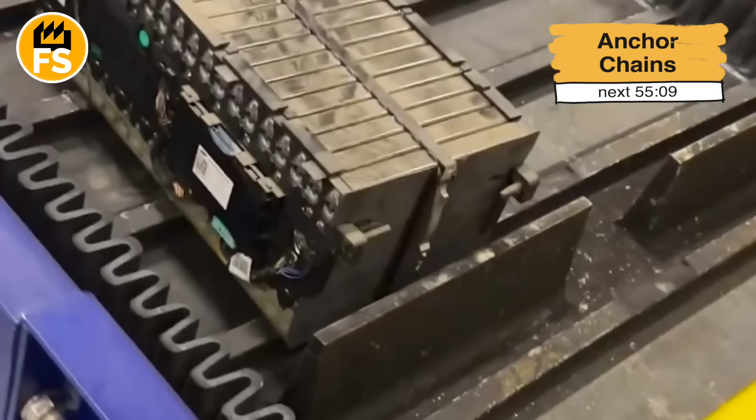No matter how much machines do, people are still the most important in the sorting process. These are mainly the workers at collection points and the operators of sorting lines. Specialists assess damaged batteries manually because machines cannot yet recognize all defects. Machines work faster, but for now, they can't do without people. Ultimately, every correctly sorted battery is a chance to recover rare earth metals and reduce environmental harm.

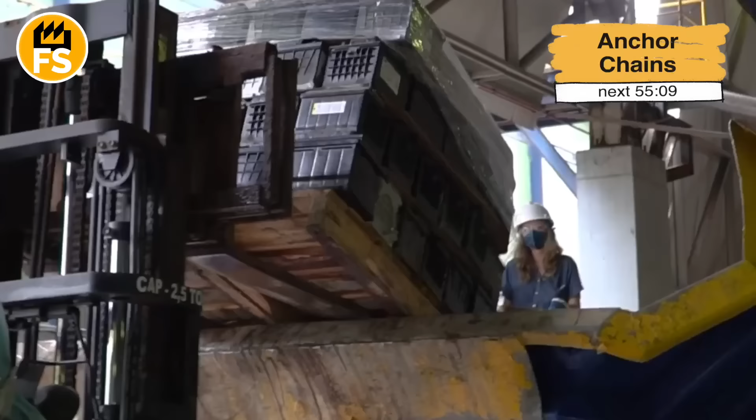Next, the batteries need to be shredded. They enter real metal jaws. The batteries are loaded into a machine that looks like a huge shredder, equipped with steel blades. The blades are so powerful that they can even shred the body of an electric car. Metal chaos ensues. The sound of tearing, grinding, and cracking. The batteries are literally ripped to shreds.

Since the batteries can be charged, they first undergo freezing in liquid nitrogen. This cools the metals and reduces the risk of ignition. Some shredders operate in sealed chambers with inert gases to exclude contact with oxygen. There is also a more spectacular option. In some places, a controlled current is first used for ignition. The battery literally burns out, leaving only the metals.

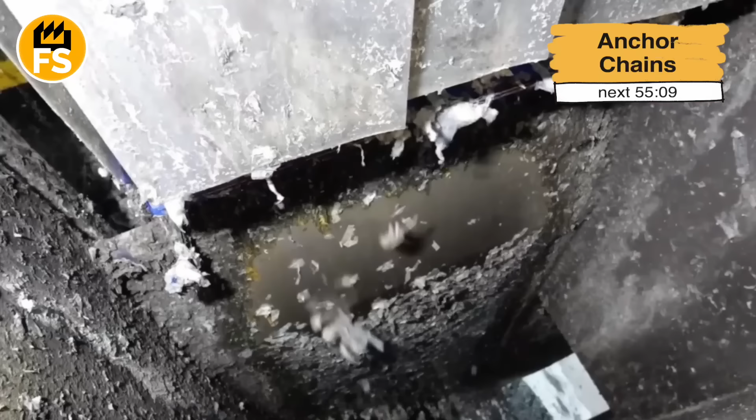The batteries are shredded into pieces from a few centimeters to a crumb, depending on the type of shredder. The blades rotate at a speed of over 2,000 revolutions per minute, and metal fragments fly in all directions with a clang inside a protected chamber. The shredded pieces pass through magnetic separators, which with filigree precision extract ferromagnetic metals, for example, nickel or cobalt. Fragments of other materials continue their journey along the conveyor.

A fine black powder, known as black mass, settles in special containers. This is where the treasures are hidden: lithium, cobalt, manganese. Machines literally suck up the powder with dust collectors to gather even the microparticles.

Residues that are not suitable for recycling, meaning plastic and traces of electrolytes, are washed away with special streams of liquid. At this stage, hydraulic crushers are used, which turn the remnants into a slurry that is easy to filter. Engineers monitor the condition of the shredders and the temperature level inside the chambers. Specialists work with the results of the shredding. They check whether all the metals have been separated and whether any extra impurities remain.

If a battery is charged and has defects, it can literally explode during shredding. But the system controls this. The explosion is extinguished by gases, and the process does not stop.

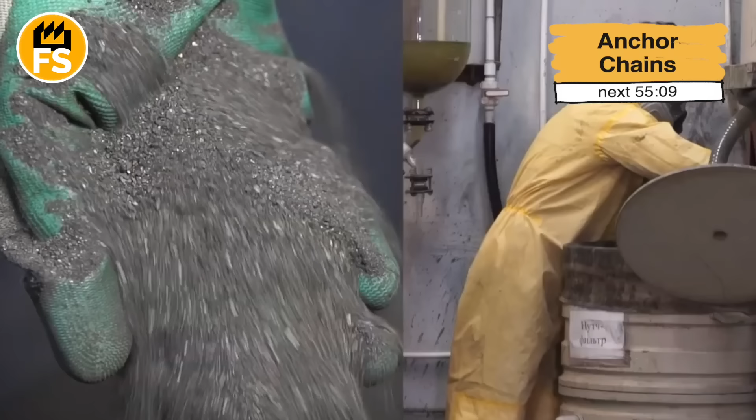After the batteries are shredded and that precious black powder is obtained, science in action, as they say, begins. The metals that seem to be hidden forever are extracted using two main methods: hydrometallurgy and pyrometallurgy. And although this may sound a bit technical, the processes themselves are extremely interesting. So what does it look like?

Battery fragments are immersed in special acid solutions. There are huge tanks where a yellowish-green liquid is bubbling. This could be sulfuric or hydrochloric acid. During immersion, a reaction occurs. Lithium, cobalt, nickel, and other metals literally dissolve in this soup.

To extract the desired metal, a clever trick is used: ion extraction. Special reagents, for example, organic compounds, are added to the liquid, which capture a specific metal, like a magnet. As a result, each metal settles into a separate layer.

When the metals are separated, they are precipitated in the form of salts or hydroxides. They look like small white or colored crystals. For example, lithium precipitates as lithium carbonate, a powder that looks like fine sugar. Cobalt becomes a bright blue precipitate, and nickel, a pale green one.

If hydrometallurgy is a gentle approach, then pyrometallurgy is more like shock therapy for metals. Here, everything literally burns and melts. The black mass is loaded into a huge arc furnace, where the temperature reaches almost 3,000 degrees Fahrenheit. The metals melt into a liquid mass, and the plastic and other residues simply burn up. The metals stratify like oil and water, but at the temperature of molten lava.

Several layers form in the furnace. Heavy metals, meaning cobalt and nickel, settle to the bottom, while lithium remains in the slag. This is the upper, lighter layer. Then this slag is broken up and processed separately to extract the lithium.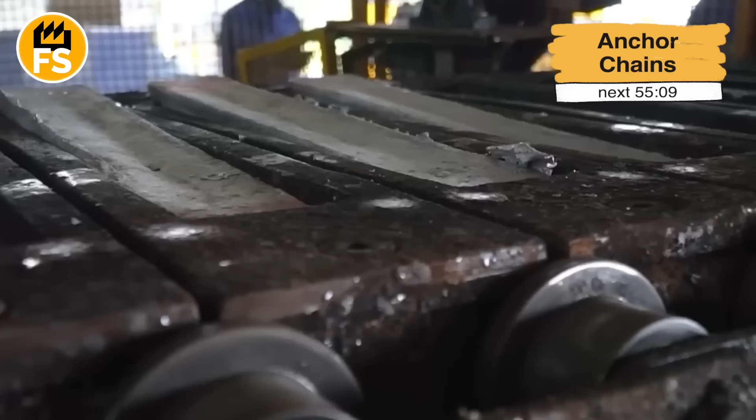After cooling, the metals take the form of small ingots, shiny, smooth, and ready for reuse. The cooling after the pyrometallurgical process usually happens in a controlled manner. After all, if you just let the molten metals cool on their own, it could take hours and sometimes even days. In addition, such cooling can create an uneven metal structure. This will affect the quality of the final product. Therefore, they are usually cooled in special chambers, where the cooling rate can be regulated.

If the controlled cooling is air-based, the ingots are left on a conveyor under powerful fans. It's like a giant hairdryer that quickly cools the metal surface. If it's water cooling, for a faster process, the metal ingots can be immersed in a bath of water or special liquids. This is a huge tank where the red-hot ingot, upon entering the water, releases clouds of steam. It looks quite spectacular.

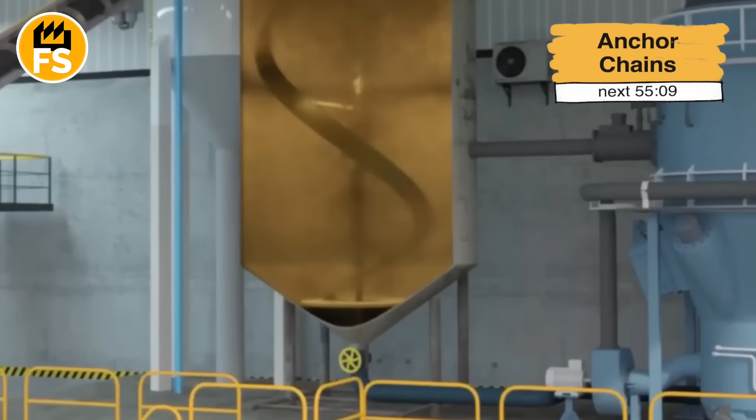Sometimes there is combined cooling. This is when some stages begin with air cooling and then are completed with water cooling to reduce stress in the metal. Controlled cooling ensures a uniform structure of the metals, which is critically important for their reuse in batteries. This reduces cracks or defects that can arise from sharp temperature changes.

The obtained lithium is used to create new batteries, those that will charge electric cars or even your phones. Nickel can become part of turbines that generate energy from wind, and cobalt, an important component of medical equipment. So we are literally closing the loop. Old batteries give life to new technologies.

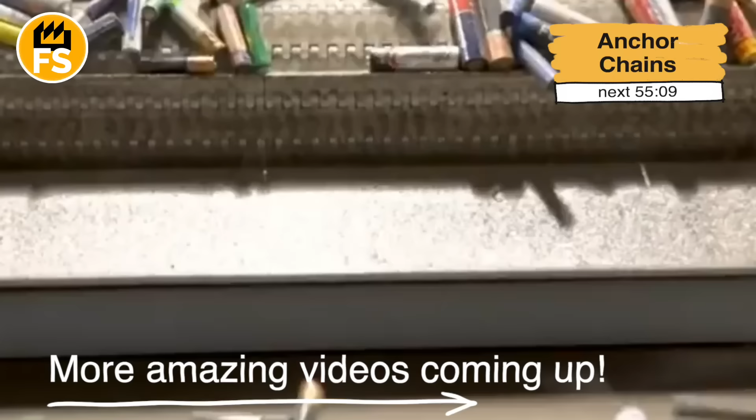Discarded batteries can turn into a real environmental disaster. First, they contain toxic substances that pollute the soil and water. Second, the mining of new rare earth metals not only depletes natural resources, but also harms the environment. Recycling solves both of these problems. You know what else is cool? The more batteries we recycle, the less we depend on mining new materials. This is a direct path to sustainable development.

Despite the popularity of lithium, only 1% of this metal is currently recycled. The main reason is the high cost and complexity of the process. But researchers are developing new technologies that could change the situation in the coming years. Interestingly, even now, electric car manufacturers like Tesla, Volkswagen, and BMW are investing in their own recycling plants to maintain control over valuable materials.

Every year, over 1 billion feet of steel chains are produced worldwide, from those that lift sea cranes to those that support bridges. But only a few of them go through a journey where precision is measured in microns, and every spark during welding is the beat of a metal heart.

Imagine, a piece of ordinary steel transforms into a link capable of withstanding tens of tons. How exactly? In a few minutes, you will see how a force that cannot be broken is born. And if you watch until the end, you'll learn the secret that determines whether a chain will survive under maximum load.

Our journey begins not in the noisy workshops, but much earlier, in the design office. It is here, at the design stage, that engineers determine what our chain will be like. What is it intended for? What loads must it withstand? Will it operate in an aggressive environment? The answers to these questions dictate the choice of material.

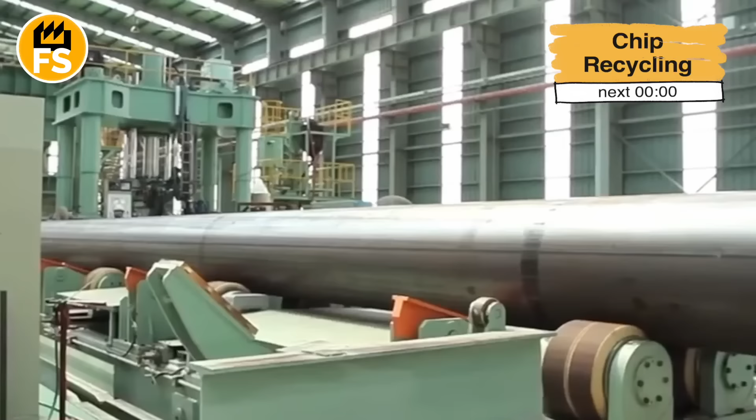In the vast majority of cases, for the manufacture of welded chains used in lifting mechanisms, industry, construction, or as fastening elements, we use high-quality steel rod. Take a look at these warehouses. Here they are, our round bars, thick, heavy, shining with strength. They can have different diameters, from a few millimeters for light chains to tens of centimeters for true giants that lift tons of cargo.

Each batch of rods undergoes a thorough incoming inspection. The metallurgical laboratory checks the chemical composition of the steel, its mechanical properties, tensile strength, impact toughness. This is critically important, as the safety and reliability of the final product depend on the quality of the raw material. Only rods that meet the highest standards are allowed for further processing. This is the first, but extremely important, step in ensuring the unsurpassed quality of our chains.

So, our selected steel rod is ready for transformation. The next stage is cutting. Here, high-precision cutting machines come into play, which, like surgeons, cut long rods into sections of a perfectly specified length. These sections will become our future links. Every millimeter matters, as the uniformity and correct geometry of the entire chain depend on the cutting accuracy. Operators carefully monitor the process, controlling the dimensions of each blank.

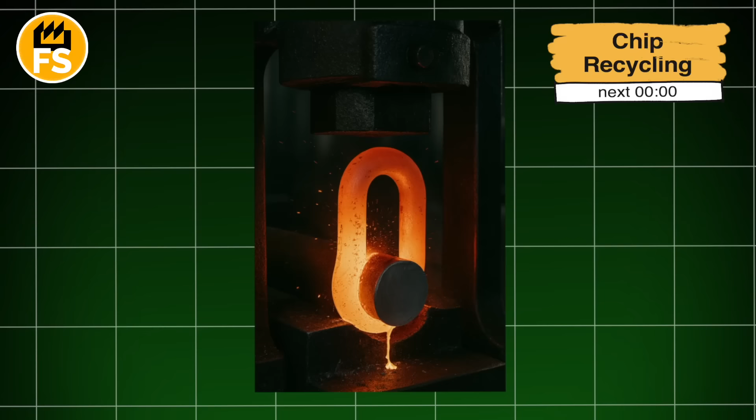And now we move on to one of the most spectacular stages: forming the link. Look at this powerful machine. It's an automatic press or a special bending unit. The metal section, heated to a plastic state, and sometimes without preheating if the diameter and steel grade allow, is fed inside, and under colossal pressure or a complex bending motion, it is transformed. Before our eyes, a straight rod is bent into a perfect oval or round shape, the future link.

It is important that the ends of the rod are not completely joined, leaving a small gap, a seam. This seam will be a key element for the next stage. The newly formed link is fed to a mechanism that threads it through an existing link of the chain. It's like an amazing dance where one part is woven into another, creating a single whole.

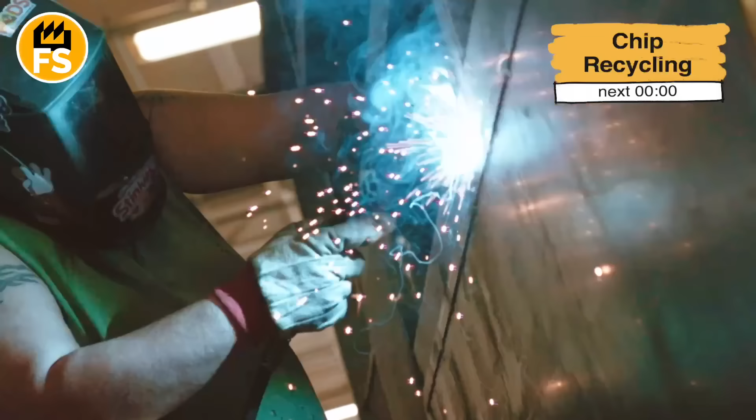And now, the most important moment: welding. Most often, electric resistance welding, or flash butt welding, is used for chains. This is a high-tech process where the ends of the link that form the seam are clamped between electrodes. A powerful electric current is passed through them, which instantly heats the metal to its melting point. See those bright flashes? The fountains of sparks? That's the metal melting. And then under the pressure of the electrodes, an upset occurs. The ends are joined, forming a strong, homogeneous weld.

In some cases, especially for very large chains, arc welding may be used, but the principle remains the same, creating an unbreakable metal joint. This weld is not just a connection. It's the weakest point of the link, and it is here that its future strength is established. Welding masters are true virtuosos, as the integrity of the entire chain depends on their work. After welding, the excess metal can be trimmed or processed for smoothness.

The newly formed and welded chain, although strong, has not yet revealed its full potential. To meet the highest requirements for strength, durability, and safety, it goes through a series of finishing processes. The first of these is calibration. The long chain passes through special dies under pressure. This ensures the precise dimensions of each link, eliminates minor deformations after welding, and gives the chain uniformity. A calibrated chain will be ideal for working with sprockets and other mechanisms where precision is critical.

After calibration, the chain heads to the heart of the factory: heat treatment. This stage is one of the most important and determines the final mechanical properties of the chain. Depending on the steel grade and desired characteristics, the chain may undergo several operations. Let's talk about each of them separately. Quenching. The chain is heated to a high temperature in special furnaces and then rapidly cooled in water, oil, or a polymer solution. This makes the steel very hard but brittle.

Tempering. To eliminate the brittleness after quenching and increase the ability to absorb impact energy without breaking, the chain is heated again, but to a lower temperature and cooled slowly. This process gives the chain the necessary balance between hardness and ductility.

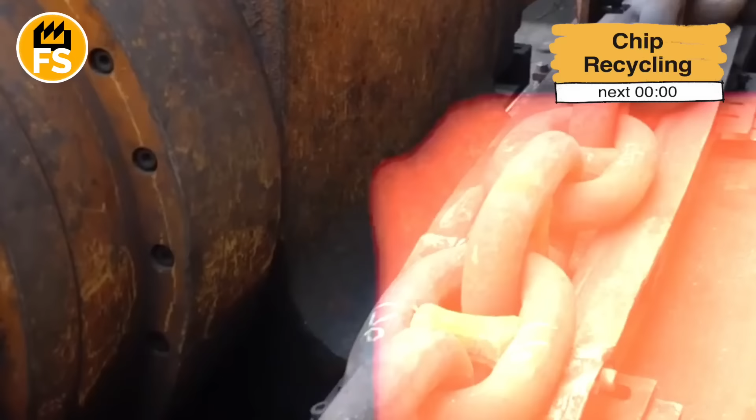Normalizing. Sometimes, instead of, or in addition to, quenching and tempering, normalizing is used, heating to a certain temperature, followed by cooling in air. This improves the metal's structure and relieves internal stresses. All these processes are carefully controlled by computer systems, as even a small change in temperature or holding time can significantly affect the final result. Heat treatment is a true art of controlling the properties of metal.

After heat treatment, the chain comes out of the furnace, but its journey is not yet over. At this stage, it may have scale on it, a layer of oxides formed at high temperatures. Therefore, the next step is cleaning. This usually happens in special shot blasting chambers. Thousands of small metal shot particles under high pressure bombard the surface of the chain, knocking off scale and other contaminants. The result? The chain becomes clean, smooth, with a pleasant metallic sheen, ready for the next stages.

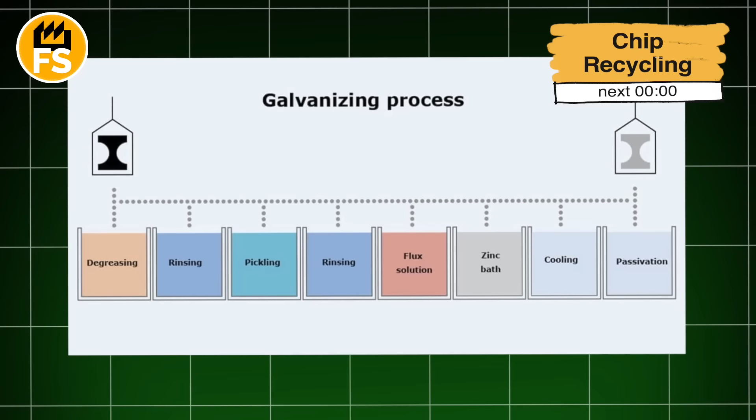In order for our chain to serve long and reliably even in difficult conditions, it needs protection from corrosion. This is where coating comes into play. The most common method is galvanizing, which can be hot dip or electroplating. In hot dip galvanizing, the chain is immersed in a bath of molten zinc at a temperature of 860 degrees Fahrenheit. Zinc, interacting with steel, forms a strong protective coating that not only prevents rust, but also has the property of self-healing for minor damages.

In electroplating, the chain is placed in an electrolytic solution, and under the action of an electric current, zinc deposits on the surface of the steel. This coating is thinner, but gives the chain a more aesthetic appearance. In addition to galvanizing, other types of coatings may be used, for example, polymer paints or special anti-corrosion compounds, depending on the purpose of the chain.

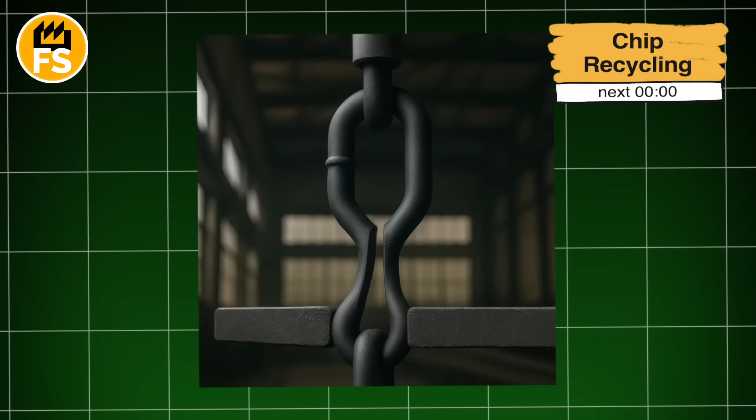It is stretched with a great force, which significantly exceeds its nominal working load, but at the same time does not reach the breaking point. This is the so-called proof load test. During this process, possible hidden defects and weak points that could manifest during operation are revealed. If the chain successfully passes this test, it means that it will withstand the declared loads and ensure safe operation.

In addition to this, other types of control are carried out. Specialists carefully inspect each link for cracks, deformations, quality of welds, and coating. With the help of special calipers and measuring instruments, the compliance of the link sizes, their shape, and the chain pitch with the specified parameters is checked.

From each batch of chains, samples are taken, which are then subjected to breaking tests. This allows us to determine the maximum breaking force that the chain can withstand and to make sure that it meets or exceeds the established norms. These are brutal but necessary tests that guarantee that the entire batch of products is reliable.

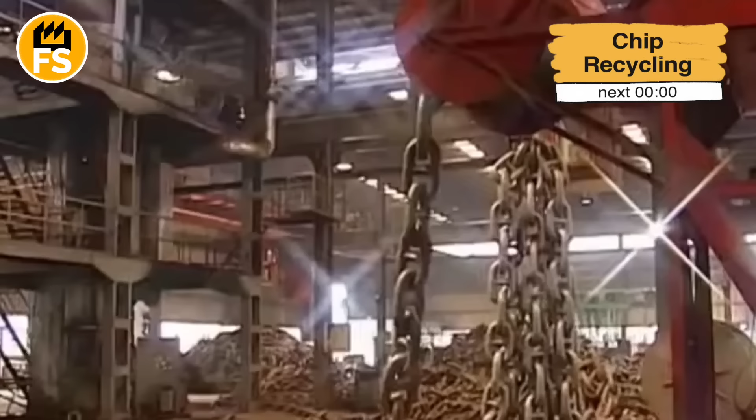Only chains that have successfully passed all stages of quality control without exception are given the right to leave the factory premises. Each batch is accompanied by a certificate of conformity, which confirms its characteristics and the passing of all tests. This is our guarantee, a guarantee that you are getting a product of the highest quality and reliability.

And now, dear viewers, we see the final result. Chains of different sizes, diameters, with different coatings, neatly laid in coils, ready to be sent to all corners of the world. They will go to the construction of skyscrapers, to port cranes, to ships, to agriculture, to production lines, everywhere where unbreakable strength, reliability, and safety are needed. From small, elegant chains for decorative purposes to huge ones that lift bridges, each of them has gone through a long and complex path of transformation, from raw metal to a high-tech product.